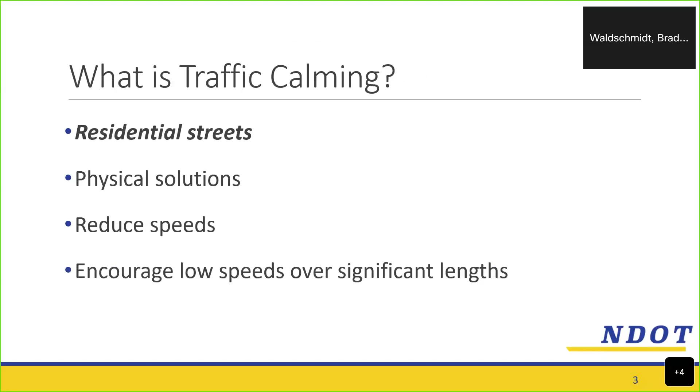So it is an important part, but what NDOT has more control over is the third thing up here, the engineering - what we can do to the roads to try to modify them in a way to, if people want to speed, maybe help dissuade them from wanting to speed as much. So traffic calming, we're focusing on residential streets, and we're looking at physical solutions to put in those streets to reduce speeds and really encourage lower speeds over an entire street. That's what we're talking about. The neighborhood street traffic calming program - it is a street program.

And so we are going to be looking at 2 or 3 streets. Some of the other projects that are being selected are really 1 street at a time. But what we're looking to do is implement devices, reducing speeds and increasing safety. That is what we're trying to do at NDOT - really increase safety on all streets. The traffic calming program is just one way through which that can occur.

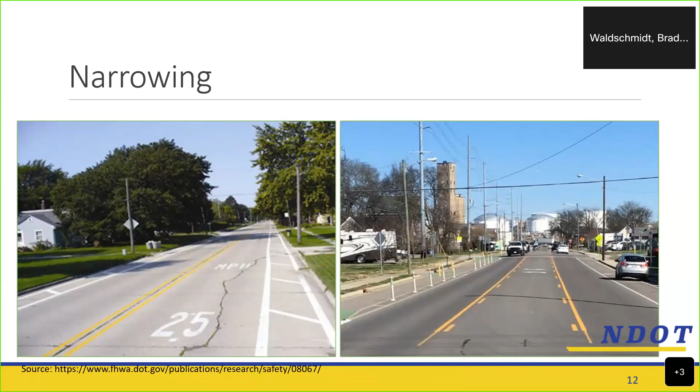So that's one option. Narrowing - I like to focus on the left picture more. Some streets just have so much pavement, you drive on them and you just think, my gosh, it's so much pavement, it's so wide. So one way to calm traffic is to actually put those white lines up and down the street so it kind of visually narrows where a motorist thinks they're supposed to be driving. You wouldn't think it would make a change because they can still just drive over the white lines, but it does make a little bit of a difference. Sometimes we just try to make any difference we can in a positive way.

Speed tables are similar to speed cushions, but they cover the entire width of the street, and they're longer. I'm going to go back to cushions really quickly - you can kind of see speed cushions are a little shorter, and there's a gap in there. Speed tables cover the full width, and they're longer. That speed table means you can usually go a little faster, just a little faster at a relatively comfortable level.

NDOT is not recommending as many speed tables, because all vehicles have to drive over these, even fire trucks, ambulances, and school WeGo buses. One benefit of speed cushions is that for larger vehicles, the gaps between the cushions are designed so fire trucks and ambulances with wider wheelbases have less impact going over them. Usually the front axle will clear, and the rear axle will either clear or have a little impact, maybe riding up on the edges. Either way, for emergency vehicles or WeGo buses, it's going to be much less impact to slow down going through these compared to speed tables. It's not no impact, but it's definitely less.

So those are the main differences between cushions and tables.

Second to last is traffic circles. These are like roundabouts, just much smaller. One thing we always have to check is that a school bus can get around them, which usually means you need a pretty big area. This rules out a lot of neighborhood intersections for traffic circles, since we don't want a WeGo bus to get stuck. So we look at whether there are intersections where a circle can actually help slow vehicles down.

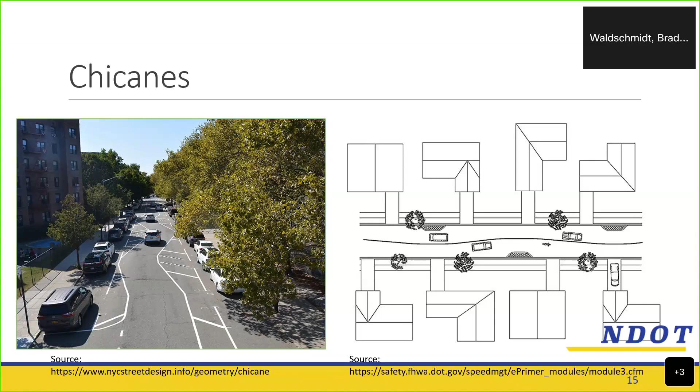For Meridian and Lischey, we're recommending what I'll call a longer speed cushion. That's because those streets are posted at 30 miles per hour. A lot of the streets we work with in the traffic calming program are posted at 25 miles per hour, but these are posted at 30, which means we want to maintain a speed at or right above 30 with our traffic calming. Speed cushions would cause a lot more speed reduction than we want if driving over them.

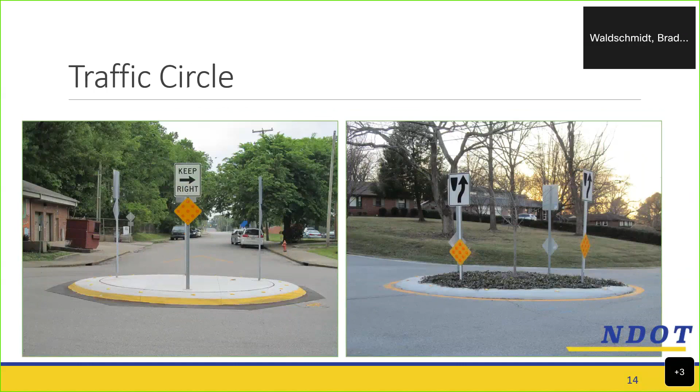So what we've done is imagine speed cushions, but longer, more like a speed table - or imagine this speed table, but with gaps in the middle where larger emergency vehicles could go through. That's what we've proposed. Cars can usually go relatively more comfortably fast over these because of how long it is, but we're still creating the gaps. I have some schematics to show you, and we'll go through the design, but first I want to talk through the photo examples with you all.

So what does that mean? Well, NDOT is going to create mailers, much like the ones you may have gotten for this meeting. You're going to get something looking very similar. I have an example I can pull up at the end of the meeting. Every property owner with property along Lischey or Meridian is going to get this mailer to vote. It'll direct them to a website where they can vote on an NDOT website. If someone doesn't have internet, there's also a phone number they can call to cast their vote.

You'll have the opportunity to vote yes or no on whether you want the traffic calming. So if you live on Lischey, you'll vote yes or no on the Lischey traffic calming. Same for Meridian - you can vote for it or against it. That's going to be open for 6 weeks. NDOT will probably send those in the mail later this month, and there'll be a 6-week voting window. Then at the end of that period, we'll count the votes.

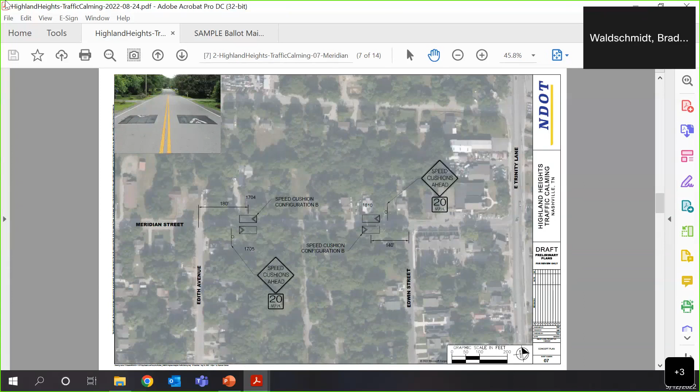Any particular address on Meridian? Around 1530? 1513. Okay, so here's 1516 and 1519. So here's, I guess it's Pullen Avenue. So here's Gatewood.

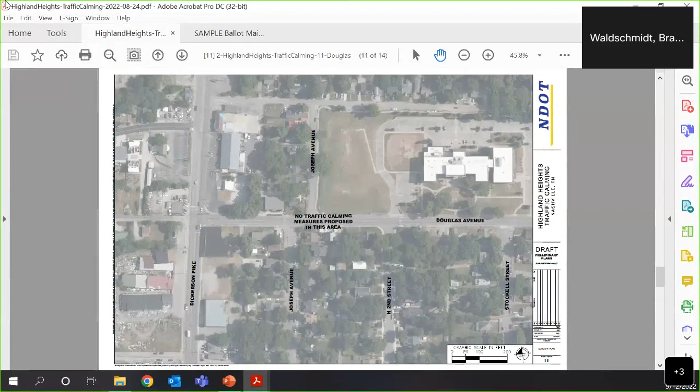Okay, I'm going to go forward a few more. And this is Douglas Avenue. Now north is straight up - we got rotated here. And you can see here's a radar feed. Actually, this one sheet shows both of them, the radar feedback signs going in either direction right there.

This shows an example. They're not perfectly to scale, but this tries to demonstrate that these will be longer, like that speed table, but still with the gaps in the middle, like the cushions.

We go along with the fire trucks and ambulances. They're either able to clear them or they have a little bit of inner tire rubbing on the angled-up part, I'll say. Exactly. Based on our measurements, they can be about 60 inches on the front for both ambulances and fire trucks.

So what you just said is the exact point why we try to make sure if you have double tires in the rear, that's the difference - you can't clear it, but it can have less of an impact because those speed cushions are ramping up. It would be, yes. So why not a table instead of a cushion? Because there's a higher chance of less impact on the cushions with the gaps than there is with a table.

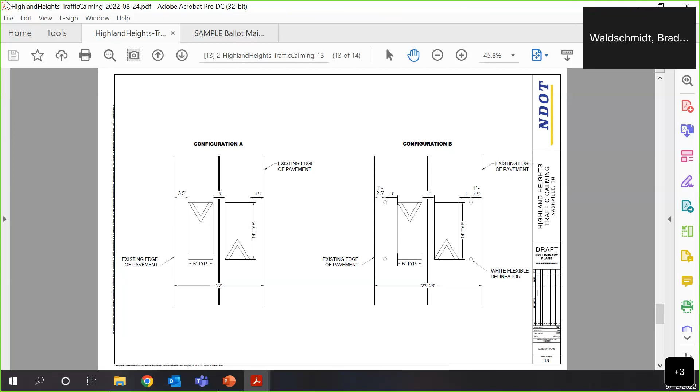If there's a table, I'm not on the PowerPoint - apologize while I try to bring that back up.

Somebody flatlining in the back and you go really fast, that probably will resuscitate them. Oh gosh, yeah, I don't know.

But you're correct though - if it's a wider vehicle base in the front axle, they'll clear. If it is a dual tire in the back, you're correct that it may not be able to clear this. What about semis, 18 wheelers? I don't know what their wheelbases are, but I would say we're not as concerned about whether 18 wheelers have to slow down as much, because ambulances and fire trucks are usually responding to an emergency.

So in neighborhoods we're usually more focused on somebody going over and what it does to jostle the trailer. I don't know if I've heard feedback on that, I don't know for sure, but I hear what you're saying - an 18 wheeler going over a speed cushion, or even a table, could jostle the back.

You might be right, then you're consistent. All the tires go up, all the tires go over. But if you have a gap in between and somebody misses it, the trailer's going to do this, and the payload's going to shift.

So you're saying with the table, if a large 18-wheeler goes over it, it's equal going over it. But if it's a speed cushion and one of their tire tracks goes over it and the other doesn't, it could create jostling. Is that right? Cargo that's shifting, and then cargo would be shifting. We have to look at it. That's a good point.

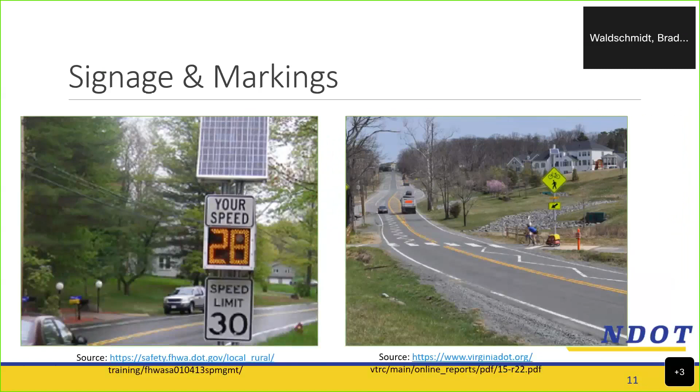I think the tables are probably about 4 to 5 inches. Did I see a question asking what the height was? The peak of the cushion is about 3 inches off the pavement, and the height of the table at the peak is around 3 inches as well, so they're both about the same height. It's just a matter of how long it is, and whether there are gaps or not. The cushions have gaps and the tables do not, but the max height is about the same, about 3 inches off the pavement.

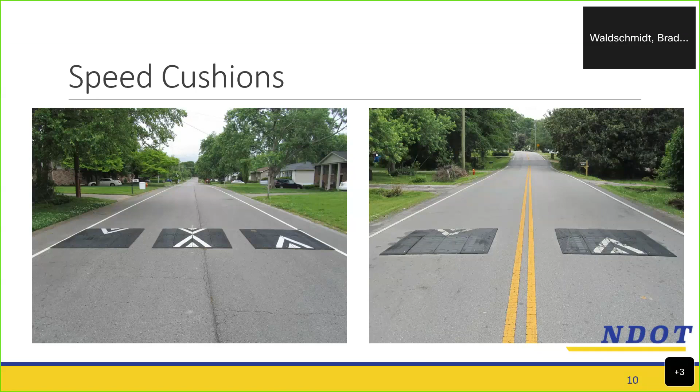Another advantage of a table is it also slows down motorcycles. Yeah, you're right, a motorcycle could hypothetically shoot the gap on cushions, whereas with a table they can't get around it. Again, it comes back to the emergency vehicle consideration. It still may have some impact, but a table may have more impact on someone responding to an emergency than the cushion. We can talk a little more about that with NDOT. We may stick with the design, or we may consider some changes.

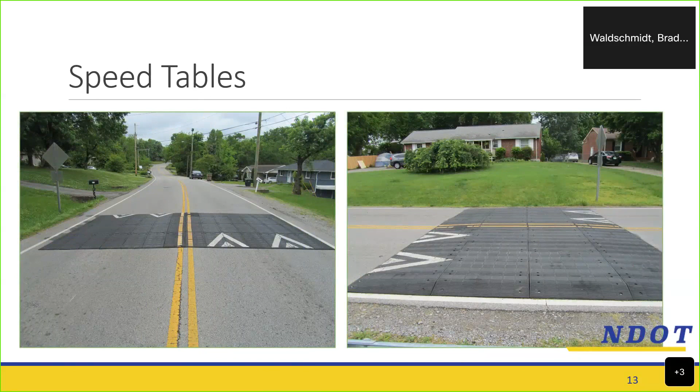Typically we want to have these speed cushions spaced around 400 to 500 feet apart. That spacing ensures they're not too far apart, because people who want to speed would have more room and distance to pick up speed. Anything shorter than that really just feels like a grocery store or mall parking lot. So the studies and FHWA guidance have shown around 400 to 500 feet is about the right spacing, sometimes less than 400, sometimes more than 500.

Now, when you look at Gatewood, for example, and full disclosure, I'm the greenhouse guy, somebody coming out of my driveway, that speed cushion right in front of Gatewood, when that truck pulls out, it's going to wobble left and right, because the truck is still in my driveway while trying to maneuver over that cushion. So I'd say that's actually an ill-placed cushion.

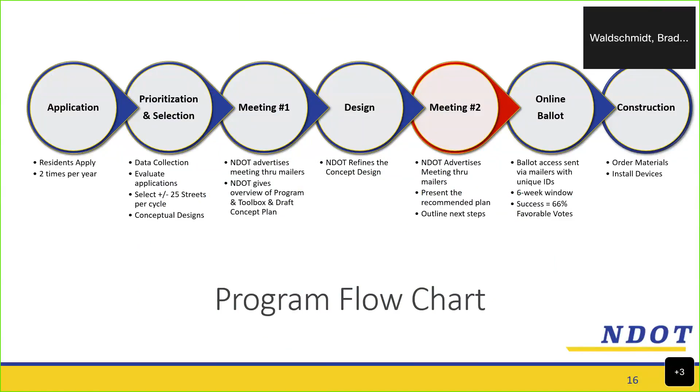So it sounds like you have a desire for a traffic signal at the intersection of Trinity and Lischey. That is a great example - traffic calming can't help you with that, but it is a legitimate Hub Nashville request. If you feel like a traffic signal should be considered at an intersection, you can submit the request to Hub Nashville.

I can't guarantee or promise anything, but we've already had a meeting with NDOT and we're waiting on you guys to come up and put the strips down to do the traffic study. I don't know who it would be because we're in the traffic calming silo, but it sounds like a study's being done. Not done yet, but it's been promised.

My understanding is they want to wait instead of being proactive and doing the study now, which we already need because we have a problem. They want to wait until the apartment complexes come online and see what the additional increase can be before they do the study. Gotcha, that's backwards because we already have a problem.

Somebody's got to get painful about this, because all of this building along that entire corridor is taking place and you're gonna have all this traffic right there with everything they're building. I mean, building almost from Trinity Lane halfway down until you get to the greenhouse. That's a lot of building. And we've already got traffic calming issues here, it's so bad. It used to be smooth as glass, and now it's horrible to go through because when they dig up the street and come back to patch their utility holes, it's horrendous.

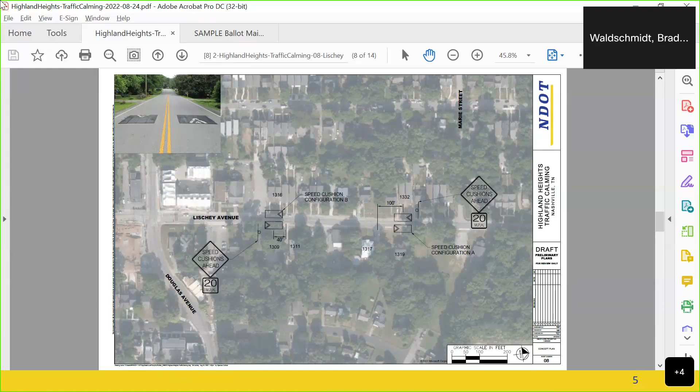Sorry, I'm going through real quick. Lischey, I hear what you're saying, especially if cars are parking on both sides of the street. It is definitely narrow. Lischey's wider than a lot of residential streets in Nashville, but if people are parking on both sides, yeah, it starts narrowing real soon.

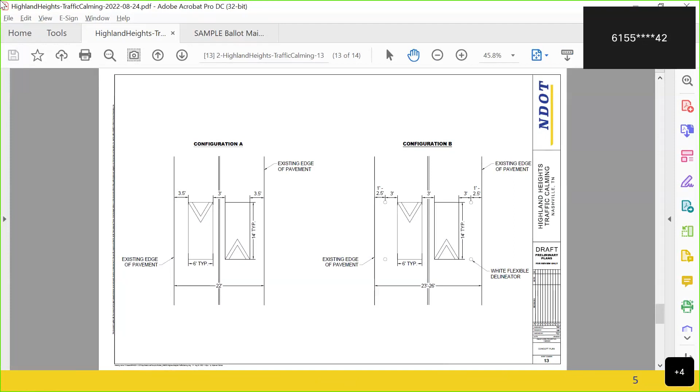But you have to remember, we have the city bus coming through here, and the bus usually has to stop to let cars by that's coming down Lischey, coming from Trinity Lane to Lischey. The bus has to stop and let the traffic come by before they can pull off.

Gotcha. It's good to note about the bus. Again, I had 3 people talking. I apologize, y'all.

But no, it's a good point about the bus. And once they get the houses built that they're building on, it's going to be more traffic. Once the church goes in, those people are going to be parking too. So they haven't come up with a plan for how these people are going to park, because people park in the front of my house and the back of my house. Half the time I can't get out of my drive in the back because people are parked in the alley. That's just how much traffic Lischey has now.

Gotcha. Well, I definitely can't control how much parking. But the traffic calming program, what we can try to control is when people get out on these roads, hopefully they'll be driving at a more manageable speed. That's what we can try to control.

This study that you did was triggered by an application that this gentleman did. That's right. So yes, you see that big 130-year-old tree is gone and that house is gone because they're putting up another big complex over there.